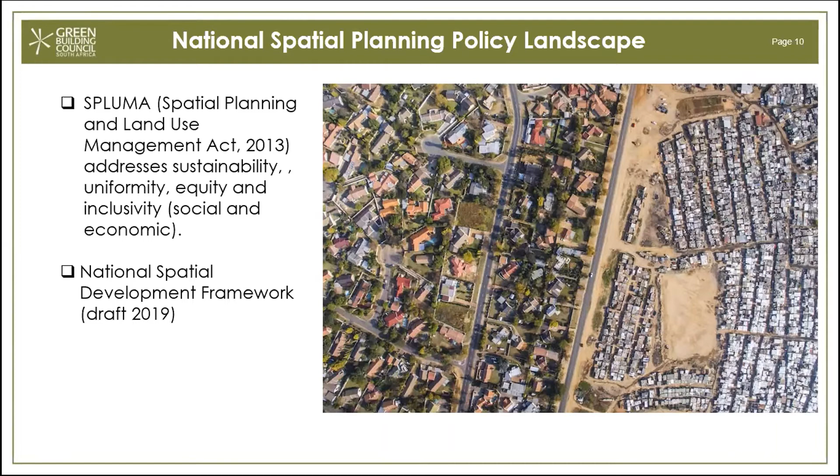At a practical level, or at an implementation level, we've got the National Spatial Development Framework. A draft has just been issued, and this, once again, is a very practical document intended to guide all spheres of government, including municipalities, when implementing their localized spatial development frameworks. And it takes into account various issues to ensure that economic growth is stimulated, as well as inclusive growth, as well as integrated development.

Moving on to policy related to public infrastructure, the first policy listed is the Infrastructure Development Act. And the purpose of this act was to address all activity related to public sector infrastructure, and to ensure that all projects relating to public sector infrastructure are delivered in such a way that results in very high social and economic benefit. The second one is the National Framework for Green Building in South Africa. And this was a DPW, Department of Public Works policy, but this is now superseded by the Public Works Green Building Policy issued at the Green Building Council convention that we host in October annually.

So this was launched last year, and this policy guides the greening of buildings managed by DPW. DPW is the largest property owner in the country. So they are responsible for the construction and the management of public sector buildings, as well as the leasing.

The policy speaks to the development of energy, water and waste management plans. It speaks to the certification of public buildings. It speaks to education and awareness. It speaks to capacity building and many other enablers to green building and sustainable development.

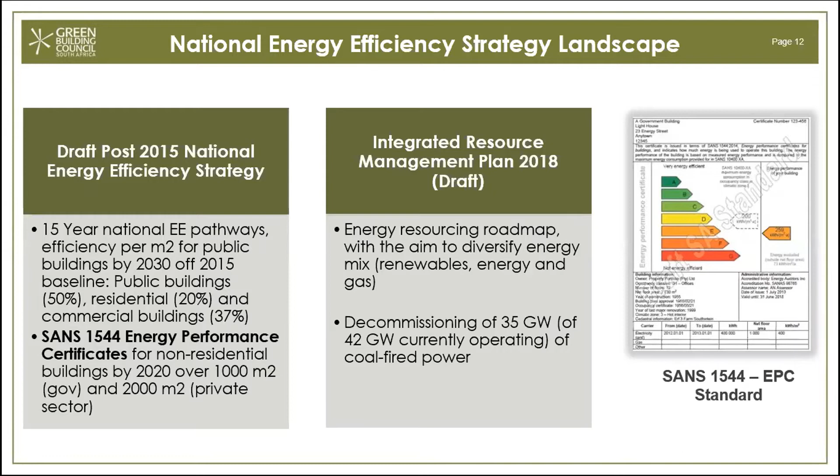Many of you will know that South Africa is a very coal-intensive country, and about 80% of the greenhouse gas emissions from the country are as a result of the energy sector. It's anticipated that ambitious targets such as the decommissioning of 35 gigawatts of 42 gigawatts, so that's over 80% of the energy supply, will no longer be coal-based. So we expect 35 gigawatts of coal-based power to be decommissioned and replaced by renewable energy and gas.

With regards to the climate change policy landscape, I've indicated the key 3 policies, but there are multiple framework documents that sit under these 3 policies. The very first was the National Climate Change Response White Paper, established in 2011. The white paper addressed both adaptation and mitigation climate change response and resourcing, etc.

Just recently, the white paper will soon be superseded by the draft climate change bill. At the moment, it's still a draft climate change bill. And the intent of the bill is to once again specify the climate change response actions required to be taken by the country, to address the resourcing needs for that, the incentives around that, and the coordination across spheres of government, the coordination across different policies.

Then lastly is the carbon tax bill and offsets related to that. And this is a very important mechanism from an industry perspective in terms of trying to disincentivize emissions. At the moment, the rate or the penalty, or the tax, is quite low. It's sitting at 120 Rand per tonne. And the bill was implemented early this year, circa June 2019.

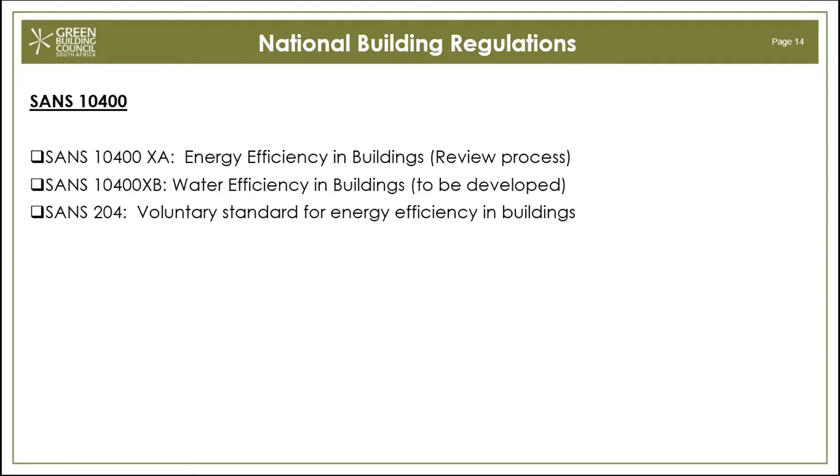At the city level, I'd like to mention the C40 Cities Program. C40 has partnered with 4 South African cities, the City of Tshwane, City of eThekwini, City of Johannesburg, and the City of Cape Town, to develop climate action plans, and by 2020 we expect that the 4 cities will have clear pathways regarding how they intend to address climate mitigation and resilience in order to adhere to the Paris Agreement targets.

Secondly, the C40 Cities Program is implementing a buildings program, and the focus here is to achieve net zero standards, as mentioned earlier. So they're looking at ensuring that the cities can achieve net zero standards come 2030 for new buildings, and net zero standards for new and existing buildings come 2050, apologies.

The mechanisms through which C40 Cities intends to achieve these targets is through assisting municipalities with developing green building bylaws. So Tshwane is already in the process of reviewing its bylaw, and the City of Johannesburg, for example, is in the process of consulting around the development of its bylaw.

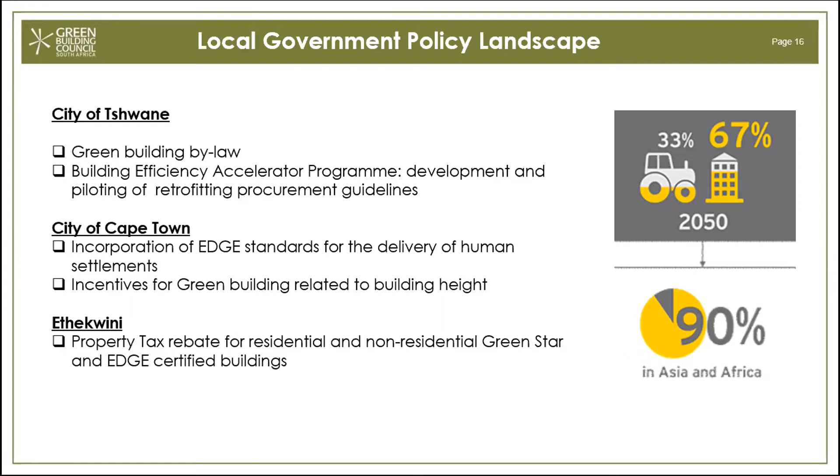And now moving on to the policy limitations, the implementation challenges and opportunities. Just at a very high level, these are some of the policy and implementation limitations as a result of the current policy framework. The first one is that the Green Building Council certification standards are currently voluntary and are not recognized by the National Building Regulations. So there's no green building policy in place at the moment.

And secondly, green building specifications or standards are implemented across spheres of government in a way that lacks uniformity. So every department and every municipality has the liberty of establishing their own efficiency standards or green building standards, and this may result in a lack of uniformity when it comes to implementation. This could be a result of the lack of coordination across the spheres of government, the lack of a green building policy, and the silos that exist between the public and private sector and within government itself.

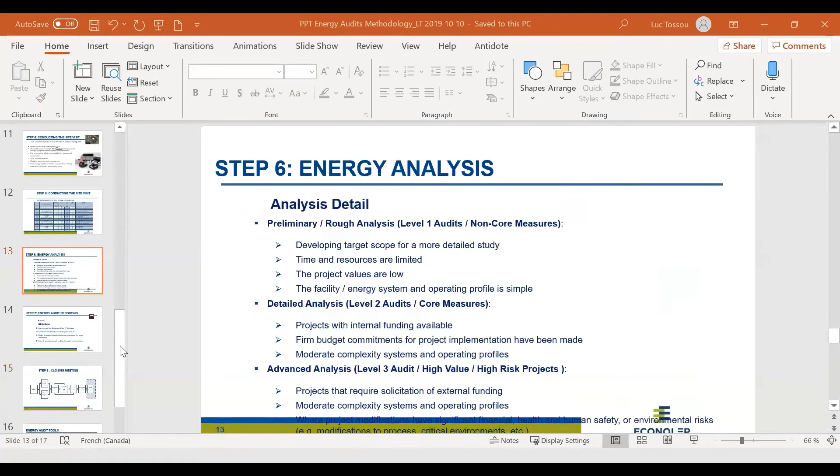Okay, thank you very much for this opportunity to participate in the regional network meeting on building. And yes, I was tasked to share with you the methodology that we use when conducting energy audits in buildings. As I said earlier, we are a firm specialized in energy efficiency, renewable energy.

Hi, Luc, sorry to disturb you. Can you just put the presentation mode? Sorry? Can you put your presentation in presentation mode? Ah, sorry. Is it okay now? It's fine, I think. Is it fine? But do you see my screen? Yes, I can see your screen.

Oh, okay, great. So yeah, as I said, we have conducted, and we are still conducting, a lot of energy audits as part of our energy efficiency projects in many parts of Africa. That's why we conducted the energy audit in Ghana for the Accra metropolitan region. We also conducted energy audits in many other countries. So what I want to say is we ensure that we follow good practices to do that. So now I would like to share with you our experience and the process, the methodology that we use when conducting energy audits.

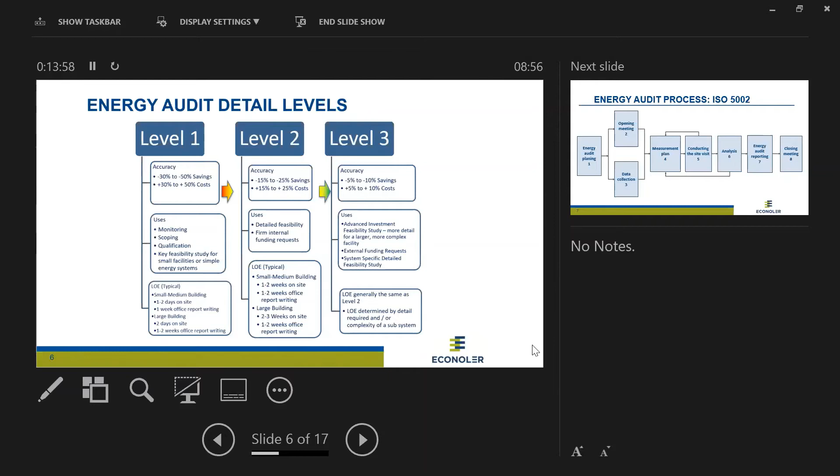Now, when talking about the accuracy, the more accurate, the more precise it is, the more expensive and consuming in terms of resources. That's the point in this slide. So these are the different types of energy audits that we have.

Now, when talking about the process, what are the different steps that we follow when we are conducting an energy audit? I have here a graphic which shows you all the different steps. And as I said, we ensure that we follow good practices. What I'm showing you here is a process recommended in ISO 50002, which gives you the basic things to do. So we have, let's say, 8 steps in the process.

So step 1, you're talking about the energy audit planning. And then step 2, the opening meeting with the site users, with the facility managers, or those who are using the facility to be audited. Then data collection in step 3, measurement plan in step 4, step 5, conducting a site visit, and then step 6, analysis, and step 7, energy audit reporting, and then in step 8, we have the closing meeting where you present the report.

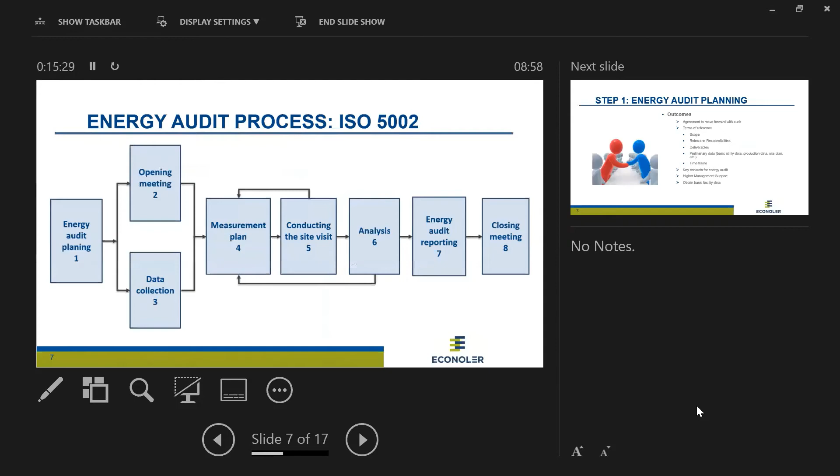So what I want to do now is to quickly go to each step, to give you more explanation on what is in that step. What do we do when we are at step 1, which is planning the energy audit? So I just want to tell you quickly the kind of activities.

Let's say that in step 1, you have 2 key elements. You have to establish the list of data that you need to collect, and you also have to plan the energy audit. You have to have a lot of meetings, discussions with the site, the facility managers, with the facility users.

So examples of activities that we have are, for example, to hold meetings with the stakeholders to socialize the energy audit initiative, to establish the development stage, to have information about previous projects, let's say energy savings projects, if they have, or any kind of projects that they conducted in the past.

And the reason we're doing that is to see what are the business priorities and the targets, and see what makes them take the decision, for example, to invest in a project. What are the investment plans? What are, for example, the minimum rates of return that they need to decide, okay, yes, we want to go ahead with the energy project? So we have these kinds of discussions with them.

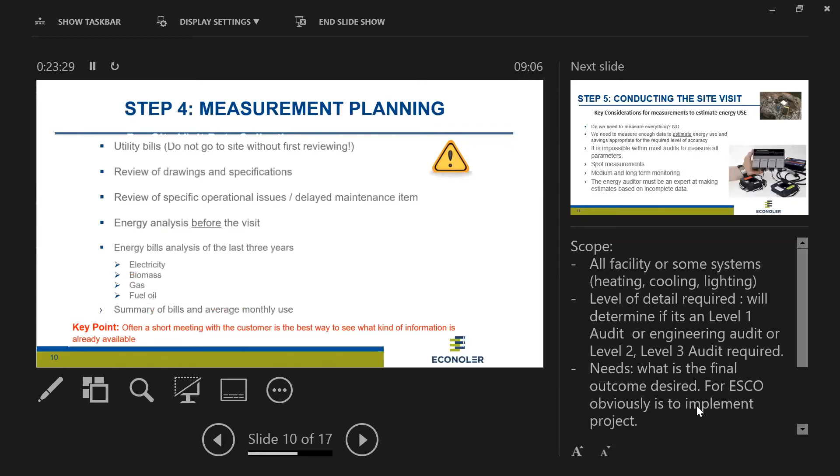And I think the key point here is to have a short meeting with the facility manager or the customer, to see what kind of information is already available, so that you know how to plan the site visit. And then step 5 is to go on the site for the visit.

And when we go on the building or on the industrial site, we go there to collect the data. We already have some data, like the utility data and many other data. Now we need to go on the site to understand the operation of the site, how the equipment are used, and to collect data on different important parameters. For example, with electric motors, we want to know at which loads the motors are operating, because that helps to identify energy saving measures. Then look at all the other systems, like the heating systems and compressed air, etc.

So it is impossible within most audits to measure all parameters. It's important to know that when we go on the site, we don't measure all the parameters. We can't, because, as I said earlier, especially when it is a level 1 audit, you are there for just 1 day or 2 days. When it is a level 2 audit, you are just there for 1 week. So you know in advance what you would need to measure. That's why step 1, the planning step, is very important.

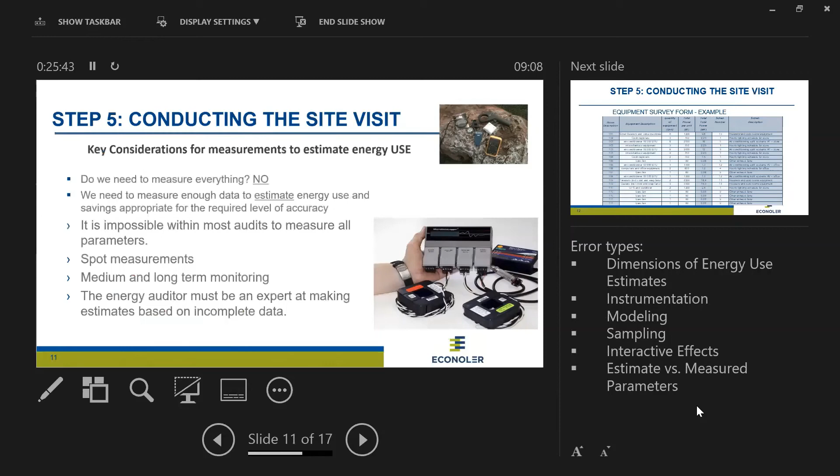Then when we are on the site, we do some spot measurement. We go there with our equipment, the lux meters, the watt meter, power meter, and many other equipment. Spot measurement, and sometimes medium and long-term monitoring. We put our power analyzer on the site and collect data continuously over 1 week or 2 weeks, so that we can be more precise in our analysis. So the energy auditor must be an expert at making estimates based on incomplete data, because these are situations that an energy auditor can face.

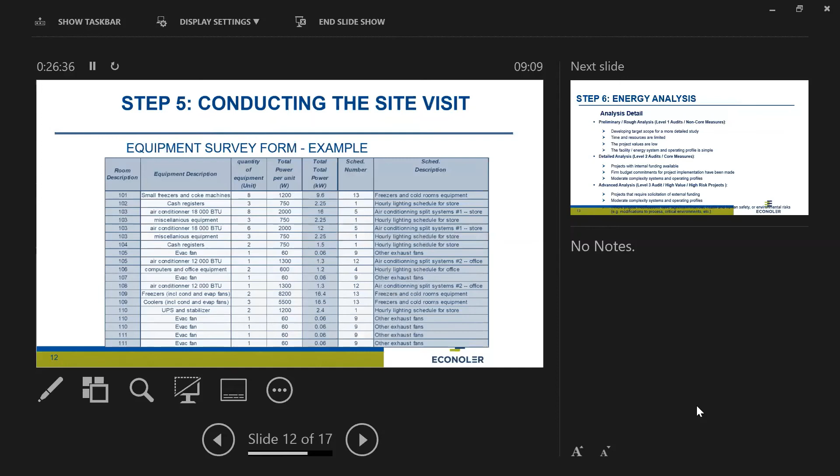And this is a table which gives you an example of a survey form that we use. Of course, when we go on the site, it is empty. After the data collection, it is full. On the first column we have the room where the equipment is used, the type of equipment, the quantity, the power, the total power in kilowatts, the schedule, so the number of hours, etc. This is an example of a table that we get, and it helps us in the analysis and to do the energy balance of the facility.

So as I said, step 6 is for analysis. This is when you do the detailed analysis of the data that you have collected. You process the data and analyze them. One of the outcomes of the analysis is an energy balance. Then you know the different forms of energy consumed at the facility or site, and the contribution of each form of energy to the total energy consumption on the site. These are the calculations we do at this step. Then we have an idea of the energy saving opportunities, and we analyze them.

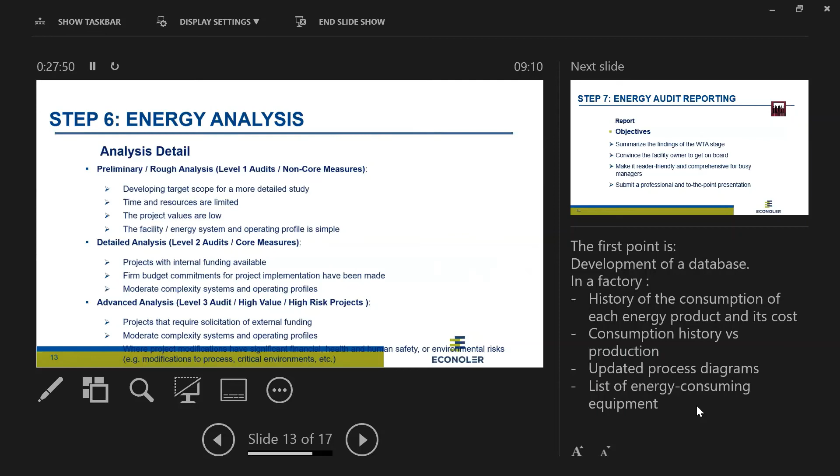We do a technical analysis, calculate the energy savings, and then we analyze and determine the financial parameters, for example, what will be the payback, and many other things. So this step is basically what you do when you come back to your office for 1 or 2 weeks to write the reports. For report writing, it is important.

Now, step 7, the 7th step is to write a report, and then depending on the type of audit, you have a format for the report. So as I said, for the level 1 energy audit, the report is shorter than for the level 2 energy audit. But you have the format, what should be in the report, because the objectives of the report are to summarize the findings of the energy audit, to convince the facility owner to get on board, and to make it reader-friendly and comprehensive for busy managers.

So that's why when we write our energy audit report, we always have an executive summary section where we make sure that we summarize the report and put the very key points and key messages in that executive summary section, because we know the managers do not have time to go through the whole report. What they will be interested in is the executive summary.

So the format of the report, the table of contents, or the different points that should be put in the report are also suggested in the standard ISO 50002, and also the other standard, the European standard. There are many other standards. I just put the European standard and ISO 50002 to indicate that there are standards. You have also the ASHRAE standard, but internationally we prefer the ISO 50002 standard. That's what we use.